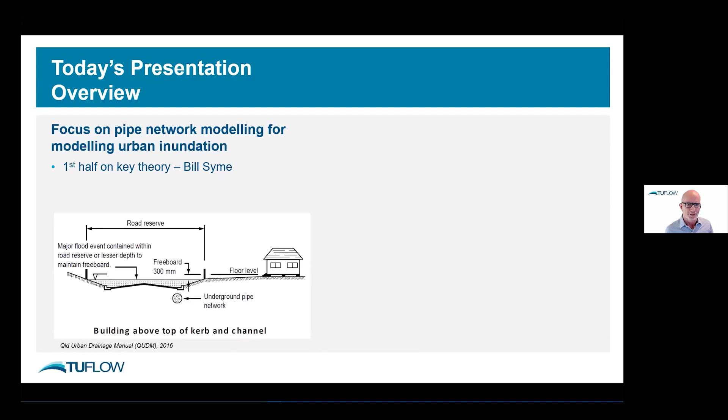The first half, I'm going to dive into a bit of theory on some more probably challenging or interesting aspects of pipe network modeling in this space. And Chris is going to take over around halfway to look at practical and quality control aspects, particularly when you get into very large networks where you really got to be on top of your data, etc., which is hard to do when you've got a lot of data.

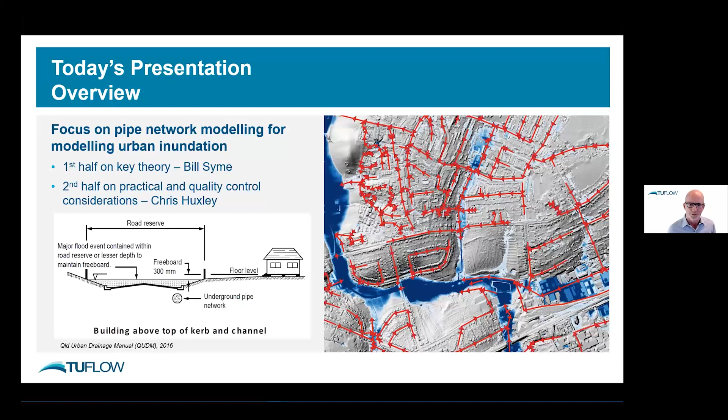So let's dive into the theory. Today what I'm going to cover briefly is the different pipe flow regimes, just to get our minds thinking about what sort of flow you can have in pipes. A large part of my presentation will focus around energy losses, particularly in manholes, because that's probably the hardest thing hydraulically to deal with, which I'll explain. And then I'll briefly run through some of the other aspects you come across in this type of modeling, such as overland flow capture, surcharging, blockages, and operational structures.

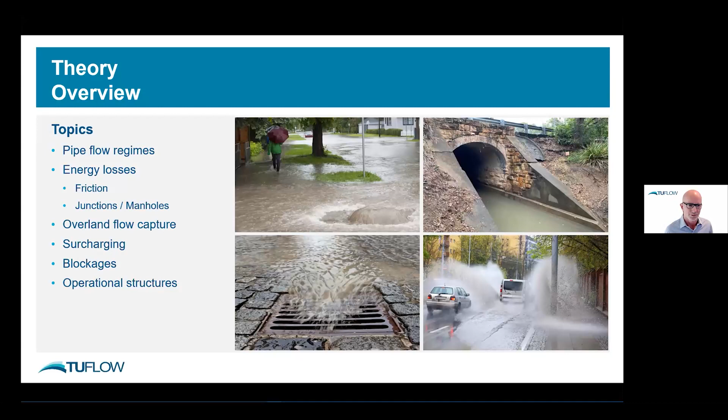A bit of terminology. Most of you will be familiar with this terminology, V for velocity. So I'll talk about the inflow or inlet pipe velocity.

So this is the velocity of the water flowing into a manhole, and velocity out, VO. Hydraulic grade line is commonly used, and the way to interpret the hydraulic grade line is effectively the water level. But when your pipe is flowing full, you have to imagine it as the water level if you stuck a vertical tube into the top of the pipe. It's not the total energy, which is water level plus V squared on 2G.

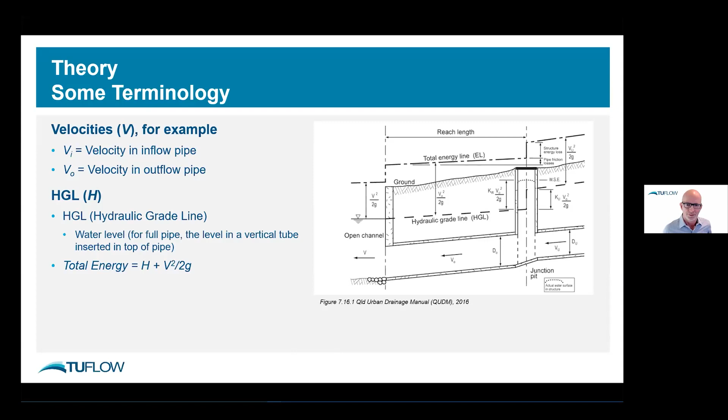Something we'll talk about quite a lot is the energy loss coefficient, which in this presentation I've used K, but other symbols like C are used. What we're talking about there is the loss of kinetic energy, which you'd know as V squared on 2G, the difference between your water level and the amount of energy the water has to keep moving itself downstream.

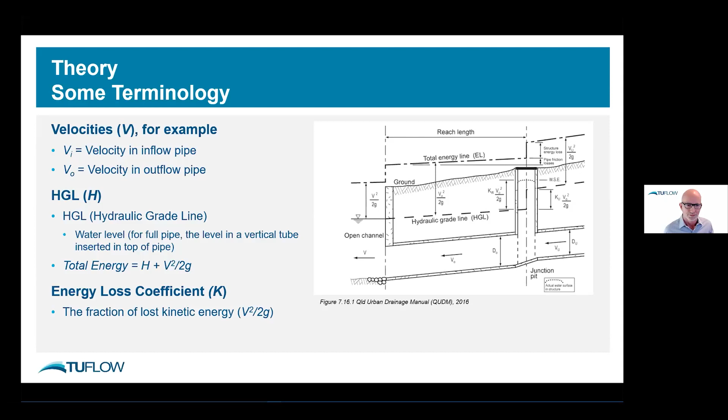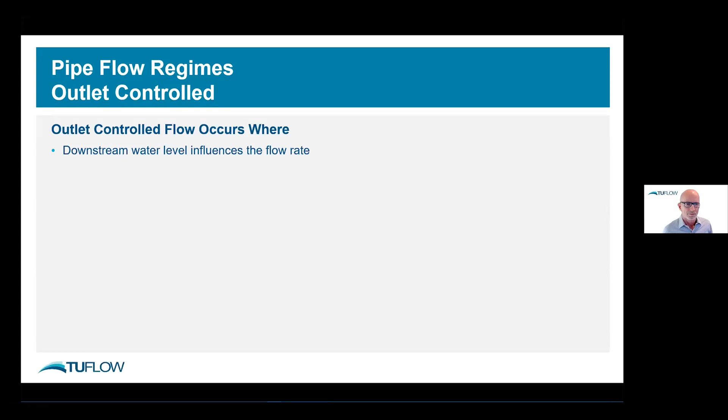Some pipe flow regimes - this is really about whether your pipe is outlet controlled or inlet controlled. It has a big bearing on how you establish the flow and the energy losses around your pipe network. Outlet control occurs where you effectively have a tail, a submerged outlet. By and large, it nearly always - what is key is that the flow is subcritical, and some people use the term pressurized. The water level could be below here, but importantly it mustn't go below the critical depth or around that point. So that's outlet control mode in terms of those two outlet scenarios.

In those cases, both inlet and outlet energy losses of that pipe will be important, as well as friction losses along the pipe. There is one other mode, and that is when you have free outflow. In this case, the flow is subcritical approaching the outlet, and the water transitions through critical depth. So that will also be outlet control, because the control is at this point here where it goes through critical flow. What's important to note here is the exit loss you'd be familiar with doesn't really apply in this case - it's just the inlet loss and, of course, friction.

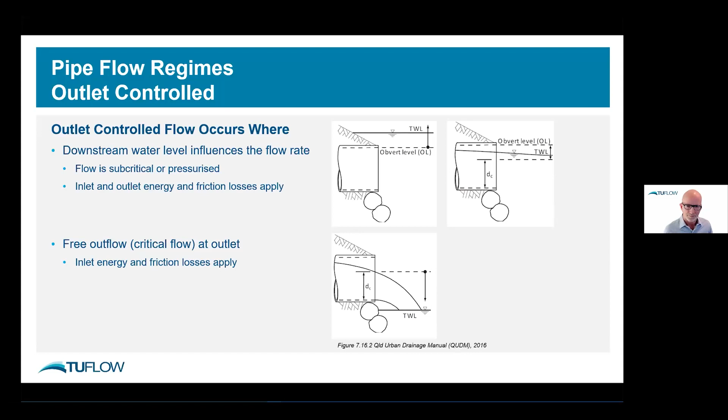Inlet control flow occurs where basically you might have supercritical flow, or the pipe is sufficiently steep to generate supercritical flow, and so would transition through the critical flow point. Also, sometimes when you have orifice flow that's not drowned out, the orifice flow forces critical flow regime inside the entrance, and that would also be an inlet control regime.

What's important to note in this space is that the downstream conditions have no effect on the flow rate, and entrance and exit energy losses aren't used in the computations.

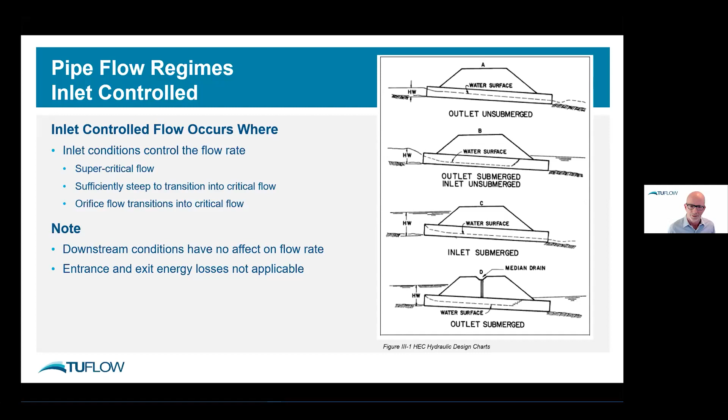So just touch briefly on the one that you would all love and know, Manning's equation. Basically it's the loss of energy due to friction - the change in energy or change in water level is a function of the friction slope times the length of the pipe.

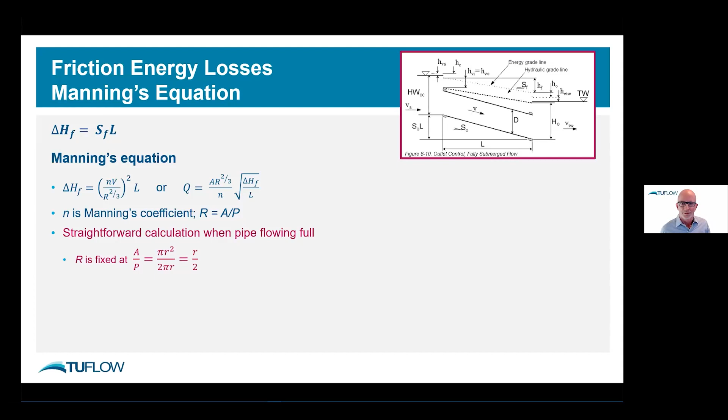This is the Manning's equation rearranged in different formats here. I won't really go into details, but what's important to note when you're in pipe world is when the pipe's flowing full, it's actually a really standard, straightforward calculation, because the hydraulic radius reduces to the radius of the pipe on 2. So it's very, very straightforward - there's no sort of complications with determining the friction contribution to losses, and you can see that in that diagram there. When everything's flowing full, you just have the friction loss plus any entrance exit losses. The more challenging one is when the pipe is partially full.

That's an open channel flow problem. It's not straightforward because you can't simply solve it - everything is dependent on either side, and you have to revert to some sort of open channel solution, which becomes a bit complicated if your pipe element is quite long, because your velocity down the pipe will change as your water level is slowly rising inside the pipe. In this case, the water level is slowly dropping because you've got a free outflow.

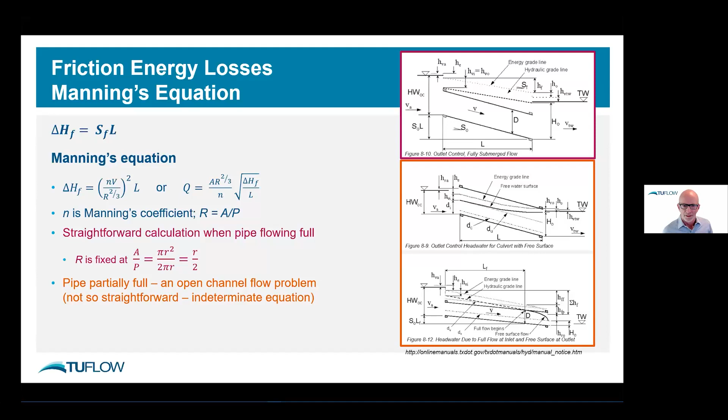So it's not a straightforward calculation. In terms of Manning's n values, as you would all know, there's plenty of guidance in the literature. Pipes will vary, and really all I want to say is if you're using Manning's n values outside industry guidelines and something is wrong, you have to have a very good justification to do that. And if you're calibrating a model, always stay within the guidelines and look elsewhere for why you might have a poor calibration.

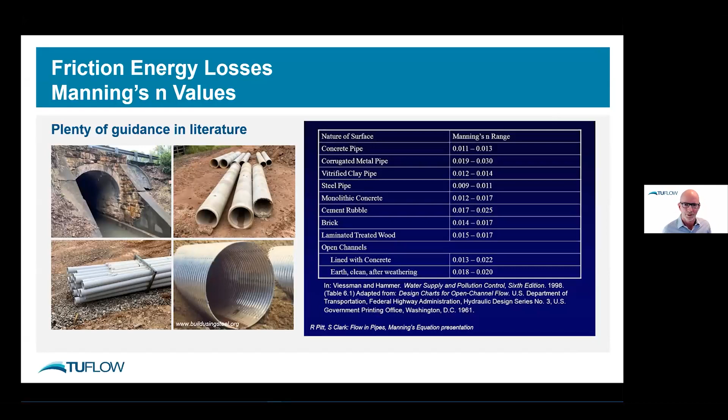So what I really want to focus on is the kinetic energy losses associated with manholes, and a simpler version would be a junction where there's no manhole. Bends and obstructions sort of fall in the same category, but what I'll focus on is manholes.

Besides the Manning's equation, this is the other equation that we all as modelers should really have in our heads when we're looking at our results. You don't have to worry about the full-blown shallow water equations in a way, you really just have to look at where your model is losing energy. It can lose energy in two ways: friction, which I just explained before, but when your water is being forced to change direction, you have a kinetic energy loss, and this is always a fraction of the velocity squared over 2g, and we use k to describe that fraction.

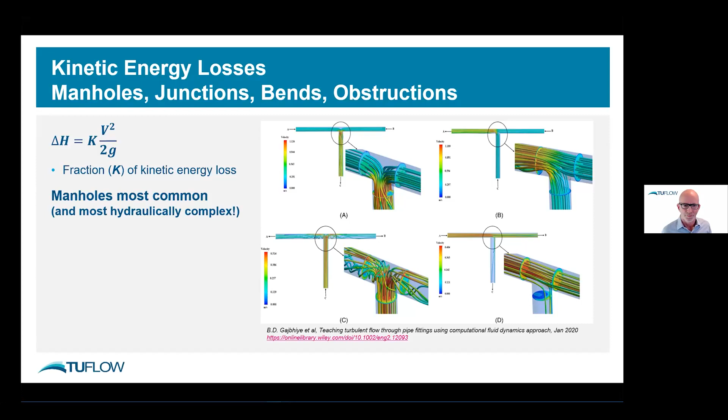So the most common element in your pipe network model that loses energy in this manner is your manholes, but it's also the most hydraulically complex, as I'll explain.

But first, we have to think about why we have manholes. From a modeling point of view, it would be much easier if we didn't have manholes, our life would be a lot easier. But they are needed, and needed for very practical reasons, such as during construction or if you need to maintain the pipe network. They're often used to accommodate a transition if you're going from a small pipe to a large pipe, where you've got a pipe coming in the side. And they're often the point at which you receive water from above-ground inlets. So they're very important in pipe network modeling, but they're really challenging to model.

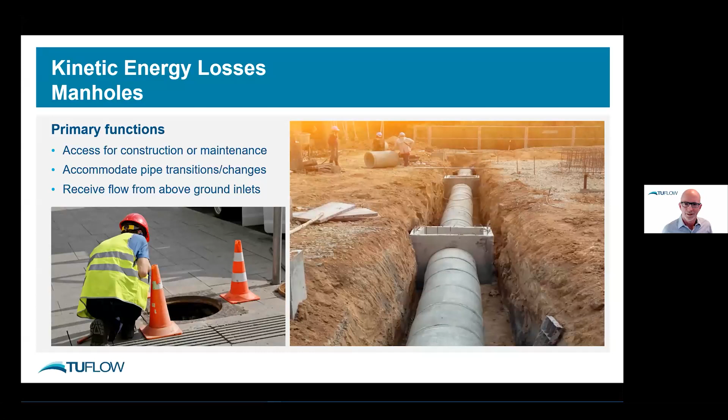So let's just look at what is going on inside a manhole. It's all about the kinetic energy losses around and through the manhole. So here we have a circular manhole, incoming pipe, outgoing pipe, some streamlines - the water will come out, it will expand, and it's that expansion of water out through here that is where you get your energy losses.

What water hates - water is very happy to contract, but it really hates slowing down. The way you have to think about it, an analogy is it's quite easy for us to jump out of something and speed up, but it's pretty brutal if we come to a grinding halt. Same with water. As water slows down, it's pushing against the water in front, so it has to dissipate energy as part of that process. It's when the water slows down or is forced to change direction that you lose that energy, and that's what it's all about.

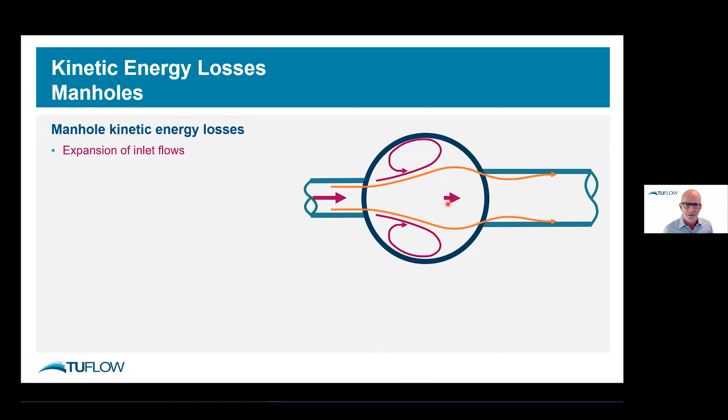So obviously here, the water's coming into the manhole, it's going to expand, you're going to have circulations generated, and energy will be lost. The other side of the coin is when the water recontracts back into the outlet pipe, you'll form a constriction here, which we call the vena contracta, and you'll have a high velocity there. Then that water has to re-expand downstream of that vena contracta, and that will involve more energy losses.

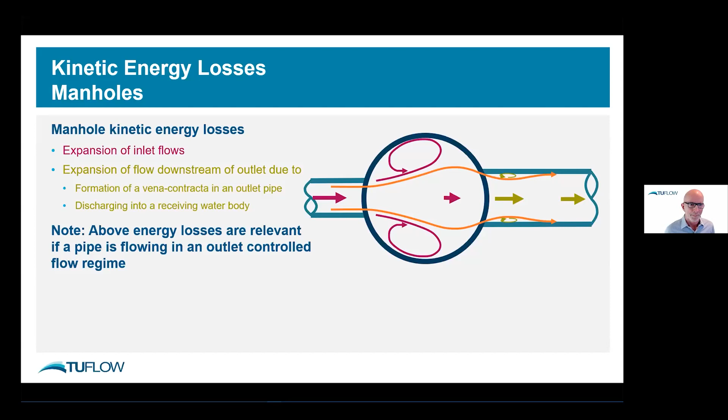So the other thing to quickly note is these energy losses are really only occurring, or are important in our modeling, when the pipe is in outlet controlled flow regime.

Let's look at other types of energy losses that can occur in a manhole. If there's a change in horizontal alignment, so if you have a pipe coming in at a different angle to your outlet pipe, the water has been pushed across to the side here. It's been forced to do something much more nasty than if it was in a straight line, and you'll get greater energy loss due to the more intense turbulence around there. So a change in horizontal alignment of your pipes, or if you have two pipes coming in together, will certainly create additional kinetic energy losses.

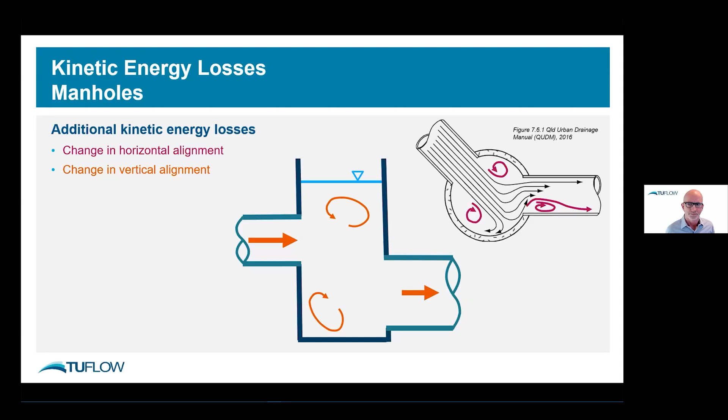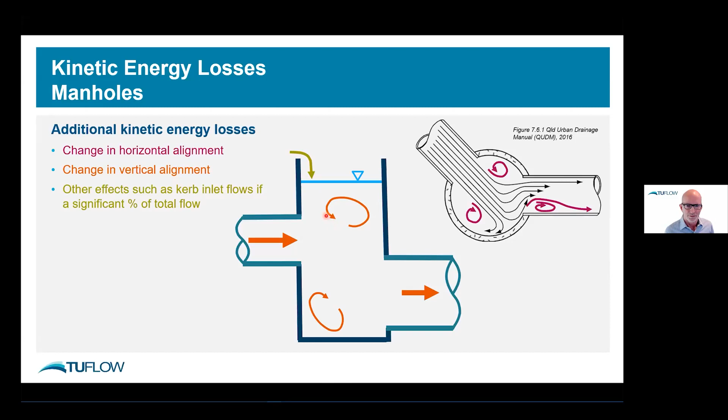Also changing vertical alignment. Here we have a pipe coming in, dropping down and then going out. That will also create additional turbulence than what you would get if that pipe was in line with the outlet pipe. And you can have other effects. For example, if there's a large amount of water coming in, either from kerb inlets or some other way, that can obviously affect the amount of turbulence you are getting inside your chamber.

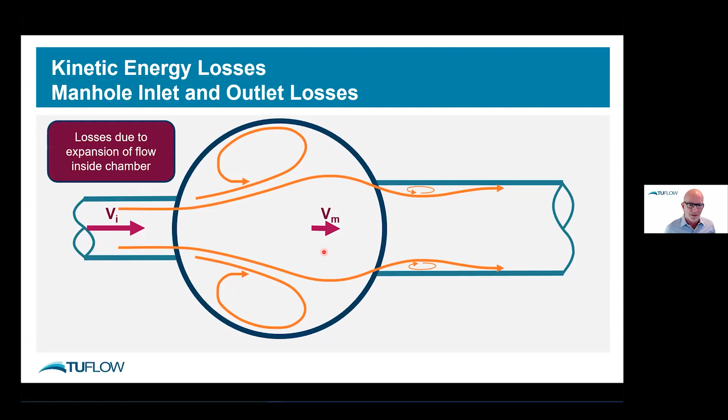Okay, let's do a bit of theory. Just as a reminder, this is our manhole. Flow's coming in, circulating, it's expanding, and so we're going to have losses due to expansion of that flow. So the inlet velocity will be quite a bit higher than the velocity in the manhole, and obviously the manhole is just highly turbulent.

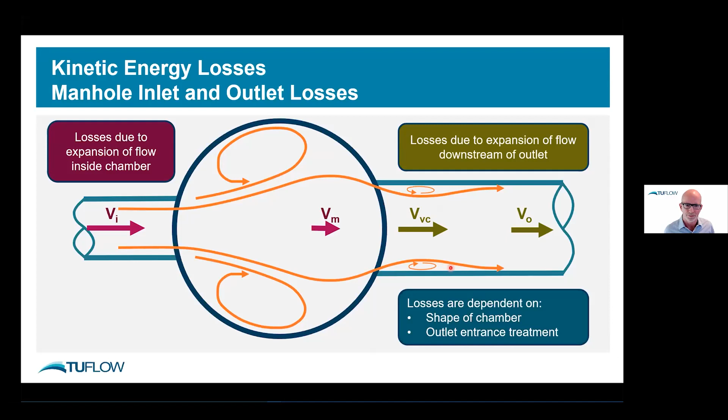But at some point it reaches a minimum velocity, then it recontracts. This is your velocity in the vena contracta, which would be the highest velocity. It'll re-expand, and then you get more losses in this space here as that water re-expands. These losses are very much dependent on the shape of the chamber and the outlet entrance treatment. So the outlet entrance treatment is what you do around this point here, because if that's nice and smoother, you will create a smaller velocity in the vena contracta, because the vena contracta will be larger. This little eddy here will be much smaller, and separation will be less.

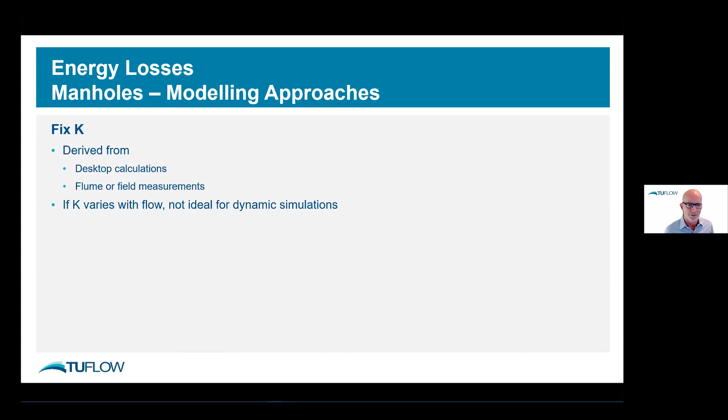So there are a couple of ways we can go about modeling these. The two most common ways: one is to just provide an energy loss coefficient, K, fixed for the whole simulation, or if you're doing a steady state type analysis, that's fine, it's just one K value. These K values for manhole configuration are derived from either desktop calculations or actually from measurements in a flume or possibly the field. And if K varies with flow, in other words if the energy loss changes from low flow to high flow, then it's not really ideal to use this approach, but it may be the approach that's preferred. But if K stays fairly constant throughout the course of the event you're modeling, then it's fine.

There's plenty of values in the literature for different manhole configurations. The only thing to be wary of is when you see a K value quoted, be aware of what velocity it applies to. By and large, a K value, the total K for a manhole, will be based on and adjusted to meet the outlet velocity Vo.

The other approach is to vary your K according to the flow conditions. That approach uses equations for the different loss components, and your model is actually recalculating those components every time step to adjust the K according to the flow conditions. That's quite a nice approach, particularly for dynamic models, which are modeling quite a large range of flows.

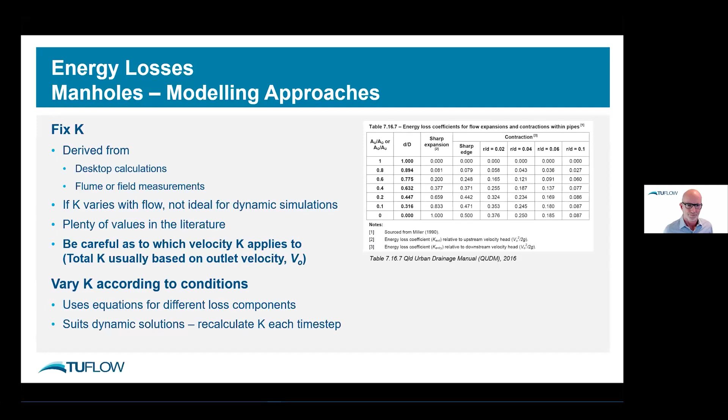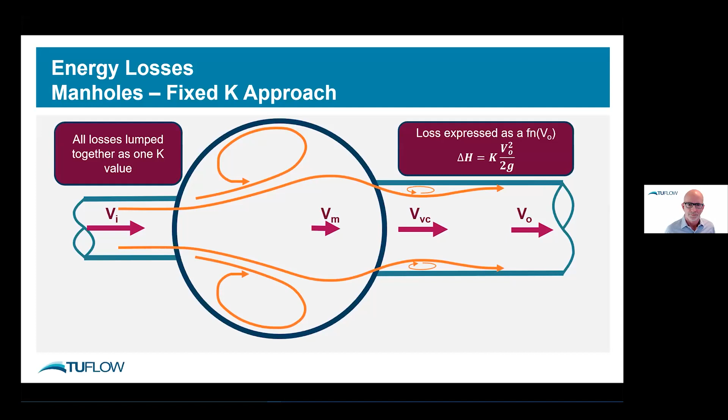Okay, so let's look at the fixed K approach. The objective here is that we come up with one K for this whole manhole. So essentially we're lumping all these losses we've been talking about as one K value, and the loss will be expressed typically as a function of the outlet velocity, that's the velocity down here. Let's assume that we only have inlet and outlet losses in this case. We don't have any sort of alignment issues. This pipe here is pretty well nicely aligned with this pipe here.

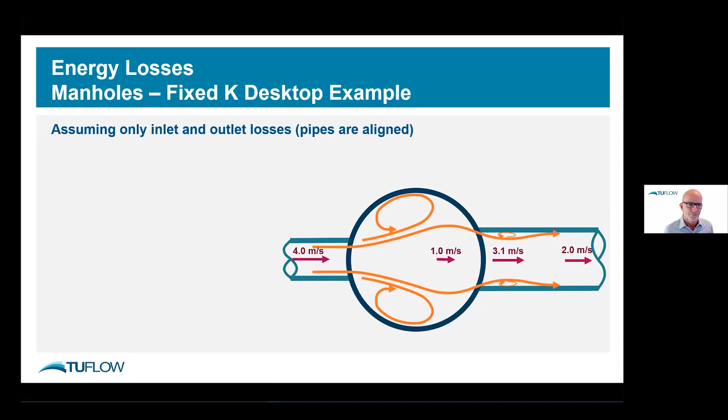I won't dive into these equations too much, but basically you can derive this equation here, which is the energy loss due to expansion of water. The way to think about it is, if your velocity downstream is zero, such as if the water is discharging into the ocean or a lake, you'll lose your complete kinetic energy because the water is going from, say, 4 meters per second to zero. So you will actually lose that complete V squared on 2G. But as in these situations here, the water doesn't lose all its force, and so the energy loss is going to be a fraction of that V squared on 2G of the upstream one. That equation can be derived from first principles, and it's commonly used in modeling.

So let's do a few calcs. We have here the inlet loss based on the velocity here and the velocity here. If you plug that into the equation, you end up with a K value of 0.56 on Vi squared on 2G. So 0.56 times 16 on 2G.

In terms of the outlet loss, it's a similar sort of exercise, but we're going from the vena contracta to here. If we assume there's about a 20% contraction here, that will give a velocity of around 3.1, because it's related to the area. So we're going from 3.1 squared to 2 squared.

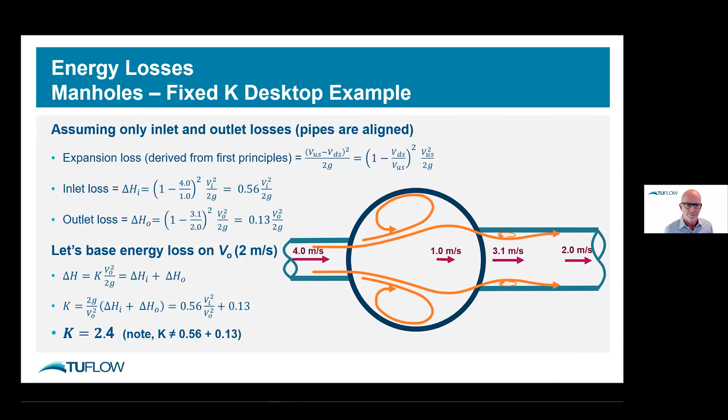In terms of the variable energy loss approach, we effectively take the individual losses at all the various locations, the expansion here, the expansion here, and add them together. These are the equations we use. For the inflow loss to the manhole, it's using the equation we just talked about. The tricky thing is what velocity in the manhole you should use.

There is a fair bit of uncertainty around that. The conservative approach will be to use a velocity based on the full width of the manhole, but sometimes it may be very justified to use a smaller width, which would give a larger velocity and less losses.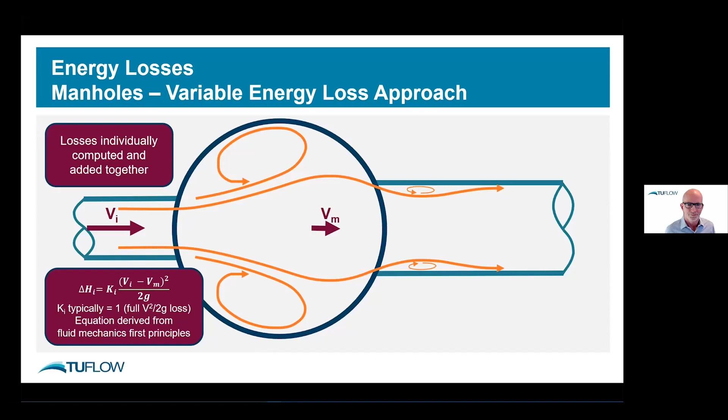On the exit, it gets a bit more challenging because we really want to know the loss from here to here, but we don't really know the contraction, and it doesn't give us a nice exact solution. So what models tend to do is use experimental data, with equations based on the manhole upstream velocity and the downstream velocity. The contracted velocity doesn't come into the equation. That's typically what's done for your inflow and outflow losses.

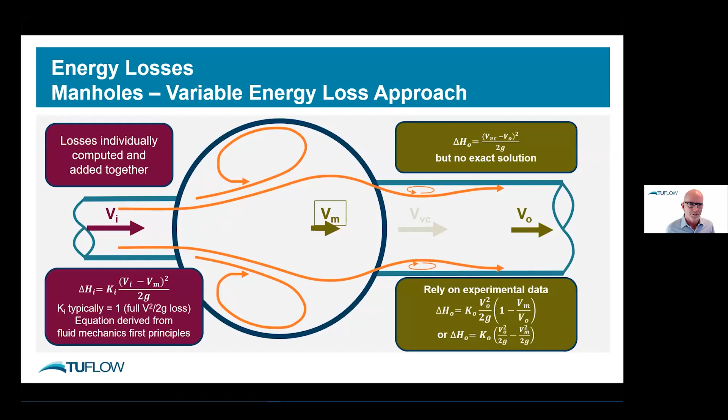This approach also has an allowance for unaligned pipes, where pipes come in at different angles. That's obviously going to create greater energy losses, and there's an equation here based on the Engelund method which accounts for that. It might also account for a change in pipe elevation.

So this variable energy loss approach uses various loss components, adding them together to give a total K value, but recomputing those every time step to give you changing conditions.

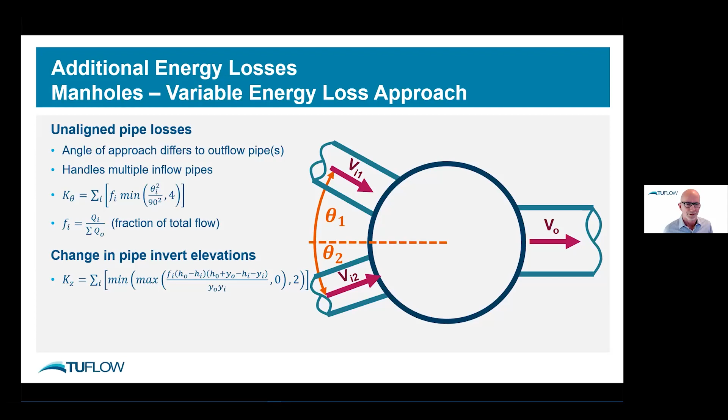Just a few things on minimizing energy losses in manholes. The objective to minimize your energy losses is to maintain your velocity through the manhole. So keeping the chamber size to a minimum is a good idea, and the other thing you can do is minimize turbulence and eddies.

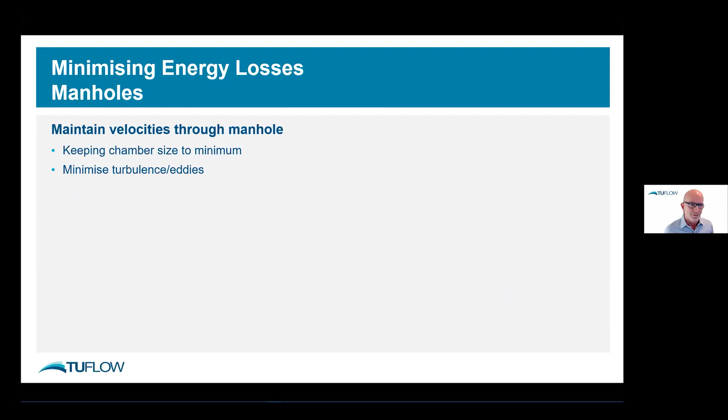One thing you can do is direct these pipes so that the flow targets the outlet point. That could give a more efficient result, maintaining the velocity or inertia of the water through the system, which gives you less losses. Benching is also used, particularly at lower flows, where you bury the pipe into the bed of the manhole.

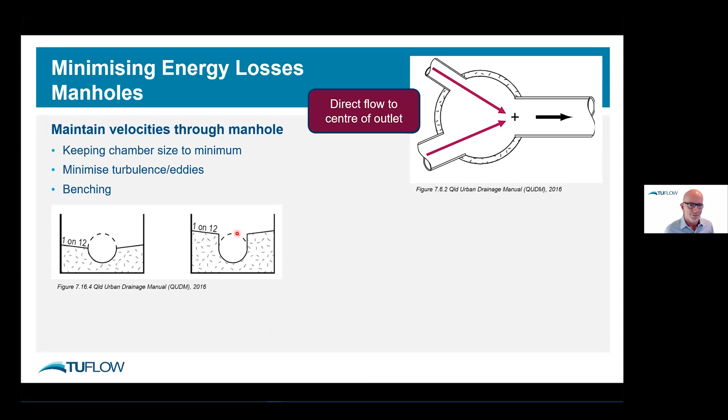So basically for flows that predominantly stay in this level of space, that will maintain a velocity through the system as well. You can also minimize the vena contracta, the contraction of the water at the outlet, and the losses associated with that. One example is using something like a curved entrance, a bell mouth outlet pipe entrance.

What that does, of course, is minimize the amount of contraction. Keep this as big as you can and minimize the size of the eddies and the separation. That will reduce your vena contracta velocity, and therefore produce less losses. So there's a range of things you can do to make these manholes more efficient.

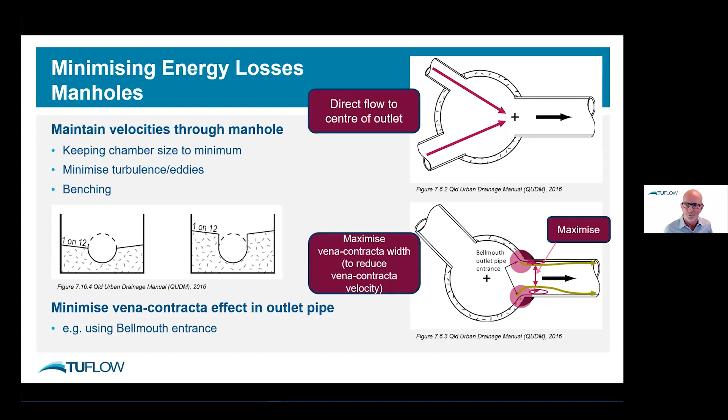I'll just go through a few other things fairly quickly. They're not so challenging theoretically, but they are aspects of pipe network modeling we need to consider. So, above ground flow capture—that's your inlets, pit drains, gully traps.

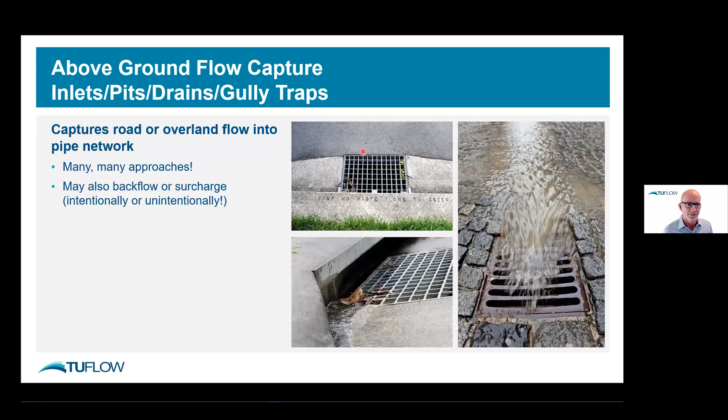There's quite a lot of approaches to how we deal with these, and they may also backflow or surcharge. So you get lots of weird and wonderful designs in terms of how to capture water from above ground. We also call these things lots of different terminologies, so we have lots of names for them, which makes it a bit confusing at times.

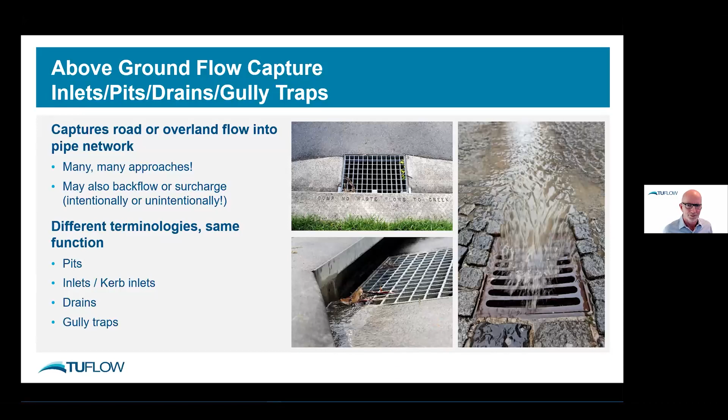The key thing is that basically there's two types of inlet, or in the industry—certainly here in Australia—two approaches. There's the on-grade inlets, and these are situations where you get a reasonable amount of bypass flow. The water comes down the gutter and bypasses, so the inlet, the pit, doesn't capture all the flow. There are often approach flow versus capture flow curves for these types of pits.

And they can also be converted to a depth versus flow curve as well. Often the relationship, these curves, are derived based on flume tests and measurements. These are out of the University of South Australia.

But what's also really important—and we're not going to go into this in detail today—is that the above ground depths or approach flow is well represented, because particularly most of these models these days are linking to a 2D domain above ground. So it's really, really important that the depth feeding into these pits, into these inlets, is accurate.

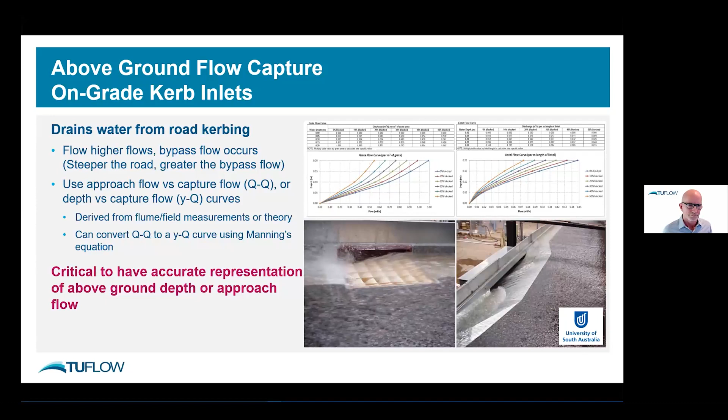Sag inlets are the other type of inlet, and these tend to be where you have water ponding at the end of the drain, maybe, or something like that. Water is basically being captured, and this tends to involve very low velocities around these, so it's quite a different loss mechanism.

There's no bypassing assumed in the curves. The other thing to be considerate of is that these are very good at collecting debris. I'll mention blockages in a second.

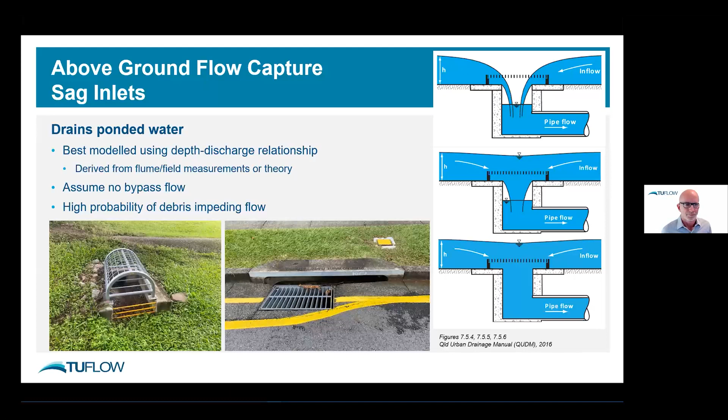These pits or inlets can also backflow, they can surcharge. So your modeling has to be able to handle that, and there's different ways of doing that. It's very important that when your pipe capacity gets exceeded, the water can reverse, if you like, back up and out through the system.

The reason that might happen, of course, is you could have blockages in the pipe network. You might have a river in flood, which is not allowing the pipe network to discharge. There's lots of reasons why this happens, so it can be quite important to be able to model this effect.

You may even need a different depth discharge curve to do that. And just be conscious that sometimes the actual water level on the ground will control—it's basically downstream controlled in terms of the amount of water that comes out through the surcharging.

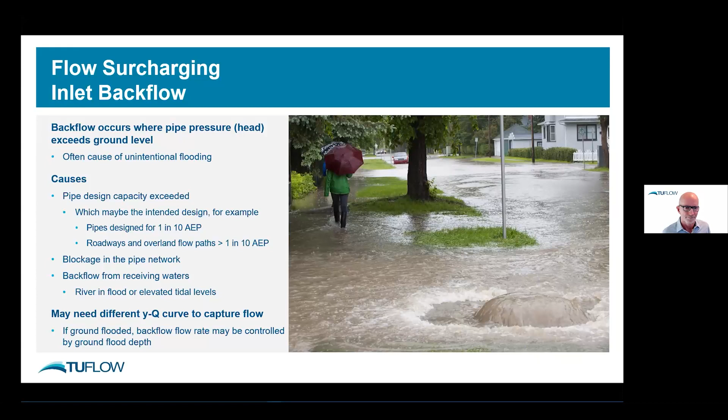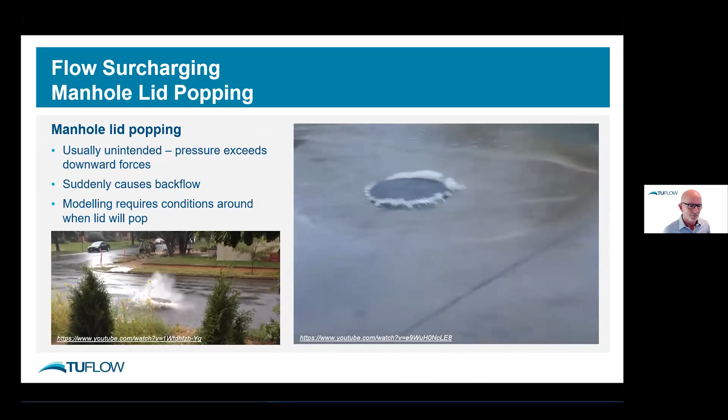The other thing that can happen, of course, is your manhole lid can pop, and that can cause a lot of sudden backflow and all sorts of problems. Probably what I wouldn't recommend is doing what this guy's about to do—he's quite brave and stood on that—but good thing, because I wouldn't recommend that when you see what can happen in something like that.

Blockages are a huge issue, typically a really big issue. In Australia there are lots of strong guidelines around that, and no doubt in other jurisdictions there are as well. Blockage can have a major impact on how your water gets into your pipe network system, and of course even internally inside the system.

This is one of my favorite photos. This bridge here, the rails on this bridge were specified because they're not prone to collecting debris. Anyway, so it can happen.

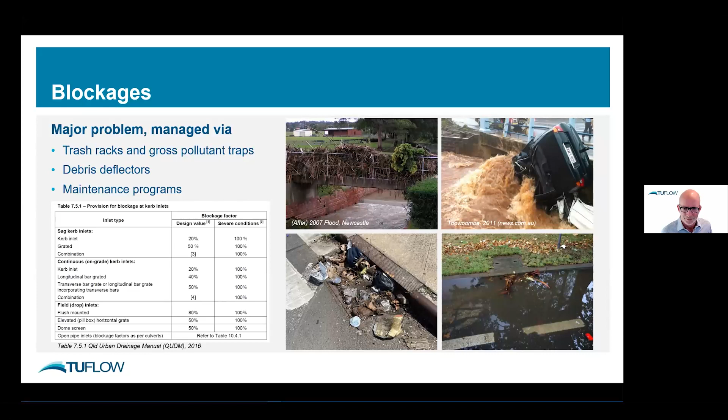Just to finish up for my side of things, operational structures - I'm not going to go into those, but they often occur in these pipe network modeling. So you may need to be able to model backflow devices, and they can have very specific energy losses associated with them, pumps and gates and other things like that. But we have a webinar coming up on April 13th where we will be diving much more deeply into operational structure modeling.

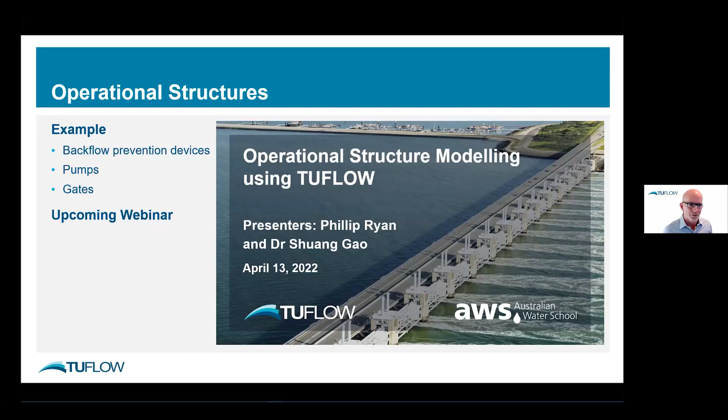So that's all I had to cover, and I'll now hand over to Chris.

Okay, thanks for that, Bill. That's all the theory. Based on the feedback we've received from previous webinars, there's a call for some more practical examples. So I thought rather than continuing on with the theory, I'd provide some demonstrations, basically how to quality check the data that goes into your models. This is particularly important with pipe network models because you're often dealing with very large data sets.

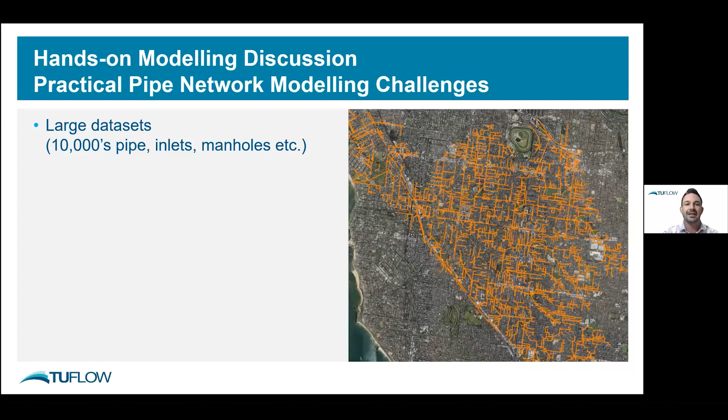This example here is a catchment down in Melbourne. This is actually what triggered the tool that I'll be presenting later on. It included over 10,000 pipes, inlets, manholes - a very, very big data set. And it was of varying quality. There were lots of issues with the data.

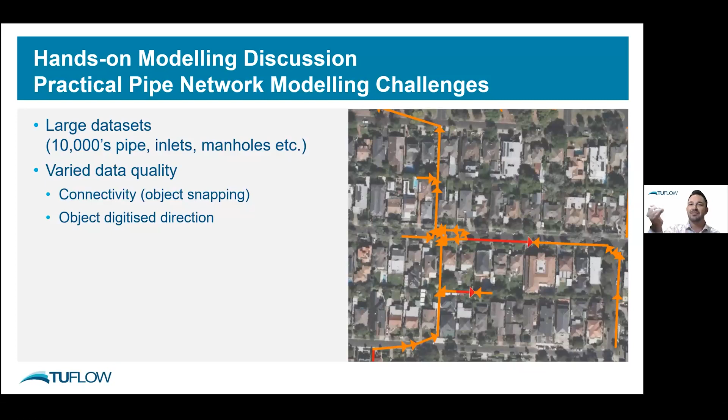There were connectivity issues - that's where, in reality, the pipe network is all connected, but in the digital data set it's not. Alternatively, there were also object direction issues where the inverts of the pipe suggest it should be flowing one way, but it was digitized the other way, which would have actually caused things to back up. And there were just errors in the data.

Here's a long section. You can see there's one pipe which is digitized in the wrong direction. There's another pipe that is quite possibly not real - that small one there. In some other locations, there were areas where the pipe inverts were listed as being well above the ground level, which doesn't reflect reality at all.

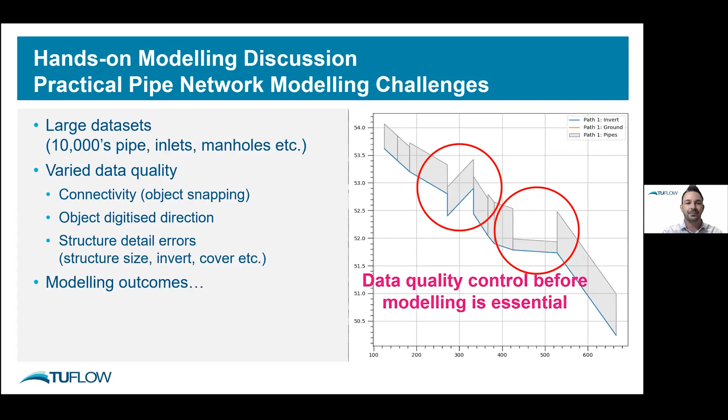With all modeling, when we're talking about modeling outcomes, the quality of the data that goes into your model has a direct impact on the quality of the results that you get out of it. So with that in mind, it's very important that you quality check your pipe network data before you even start your modeling.

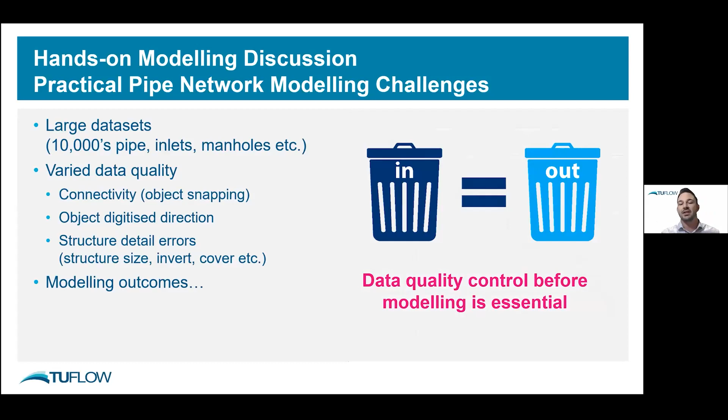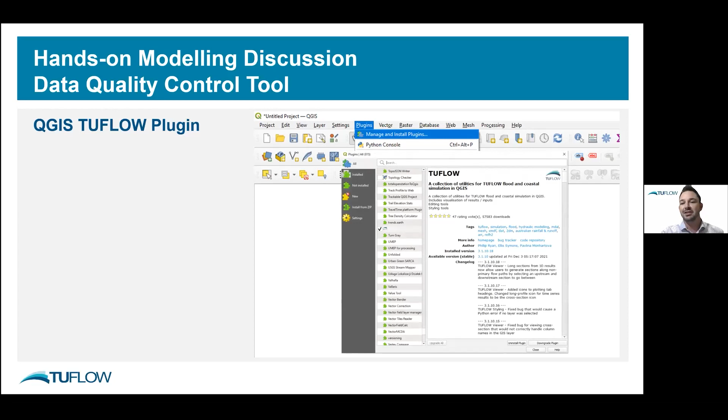I'll be doing that using QGIS, using the TUFLOW plugin. I assume that everyone is probably using QGIS, but with 1,000 registrations for this, even if 10% of you aren't, I'll go through the basics so you're at least familiar with it. To install a plugin, just click on the plugins tab and scroll down to manage and install plugins. If you're looking for the TUFLOW plugin, which I'll be using, search for it and click install. It's as simple as that.

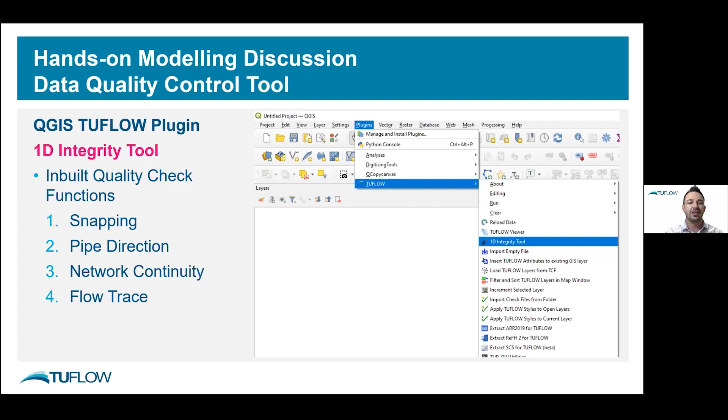After you install the plugin, you'll see there's a variety of different features included in the TUFLOW plugin, and one of them is the 1D integrity tool. That's what I'll be focusing on now, and there'll be 4 specific functions I'll provide a demonstration of: the snapping function, pipe direction check function, network continuity, and also flow trace.

The prior data set's probably a bit big for a demonstration, so I've pulled this down to a smaller model. This one here only has about 1,000 pipes. It uses a 2D cell resolution of 1 metre per cell, and we've used a direct rainfall inflow approach. That's where every single 2D cell gets wet and then the water flows over, and where you've got inlets, it goes into the pipe network.

Let's start by looking at the snapping tool. First of all, I'll just open up the 1D integrity tool and load in the input data sets. When you load the integrity tool, you'll see there are 2 different blocks to the interface - an input layers block and also the functions block. In the input layers section, you can actually load in multiple different data sets. If your pipe network data is made up collectively of, say, 10 different data sets, you can load them all in at once and it'll assume they're all together for subsequent analysis. So we'd load those files in.

Once they're loaded, it's just simply a matter of going down to the function that you want to use and clicking run. Here I'll start with using the snapping tool. It's essentially looking for any locations in this pipe network where the features are not snapped together within a defined exclusion radius - within 10 map units in this instance. It's identified around a dozen locations where it thinks there might well be pipes that should be connected that aren't. If we zoom in on one of these locations and just look at the input data set, things look like they line up, but zooming right in, they're not.

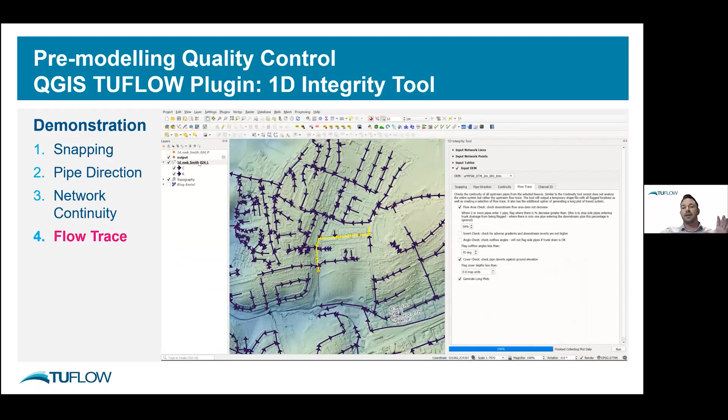The other useful feature of the flow trace is literally just checking that the full pipe network is connected as you'd expect. What you do here is click on the most downstream pipe, turn off the long section plot, and just click run, and it'll show highlighted the whole connected pipe network to that particular element. What this is doing is basically giving you a way to confirm that everything is snapped together.

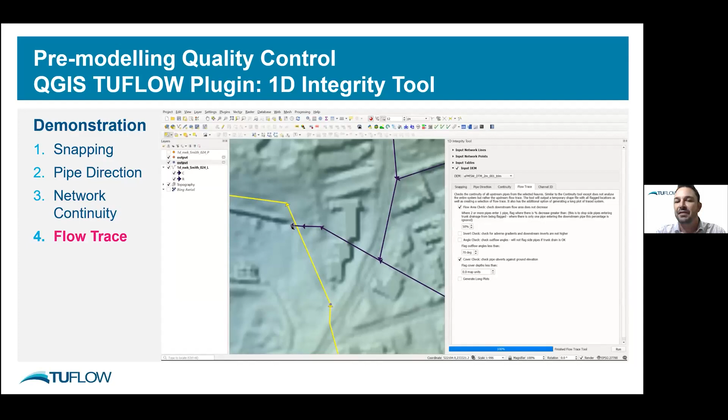It could be that the snapping radius used in the initial step was too small to pick up a disconnection in the pipe network. If that's the case, doing this for each outlet to your pipe network will confirm that things are all connected as they should be.

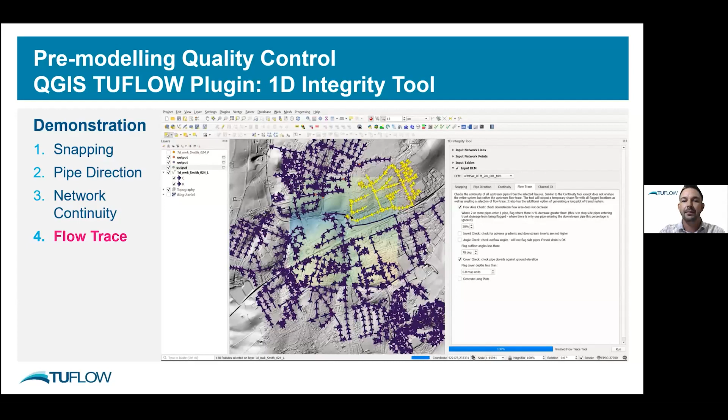In this instance here, both of those sections of the pipe network are meant to be separated. They're not meant to be connected.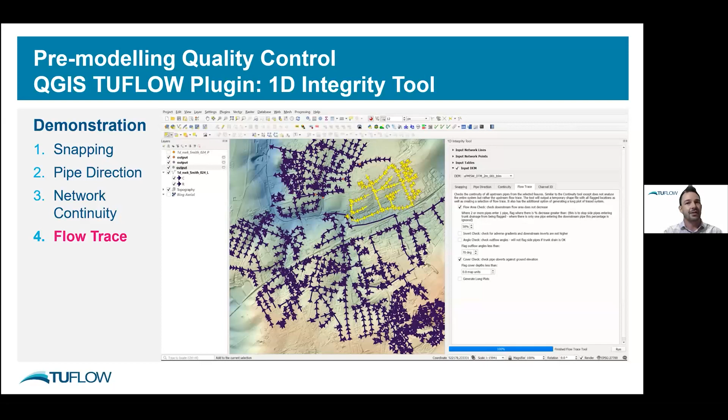All right, so you've now gone through and you trust the data that's going into your model. The next step would be to enter that data in the model, run the simulation, and look at some results. I like to focus on a few different summary results to help guide where I need to interrogate my 1D and 2D results more closely to confirm whether the results are correct or not.

For this, I'll be looking at 2 different event result data sets. One will be for a small event that roughly matches the expected capacity of the pipe network. Another is for a much larger event, which is orders of magnitude bigger than the expected capacity.

So there I've loaded in the pipe capacity summary file, max min flow summary file, and now I'm loading in the dynamic 1D, 2D results. So once again, you'll see I'll open up 2 different result data sets here, one for the small event and one for a large event.

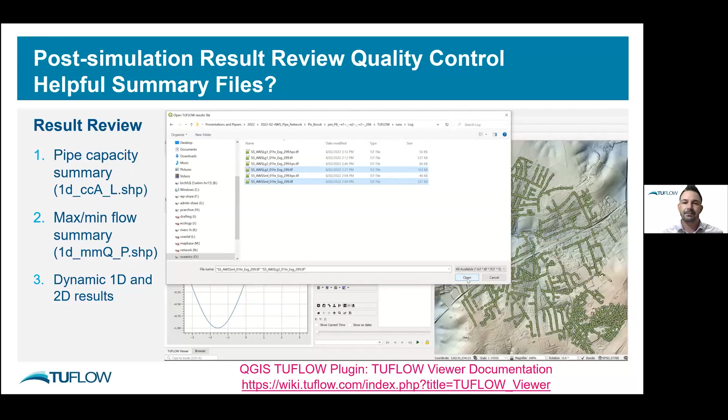Okay, those results are loaded. Let's now first focus on the pipe capacity summary result, and I'll be using the event which matches the capacity of the pipe network.

First of all, let's just look at what attributes are included in this file. You'll see there's some flow summary results, so percent full max, percent time when it was full. There's some area summaries, and then there's also some surcharge summaries.

For this demonstration, I'll be focusing on a review of the percent full max, but it might also be useful when you're doing these reviews to do a similar analysis for all of the elements where surcharge is being experienced. I won't go into demonstrate that though - you can basically mirror what I'm doing with P max for surcharging. In the interest of time, there's no need.

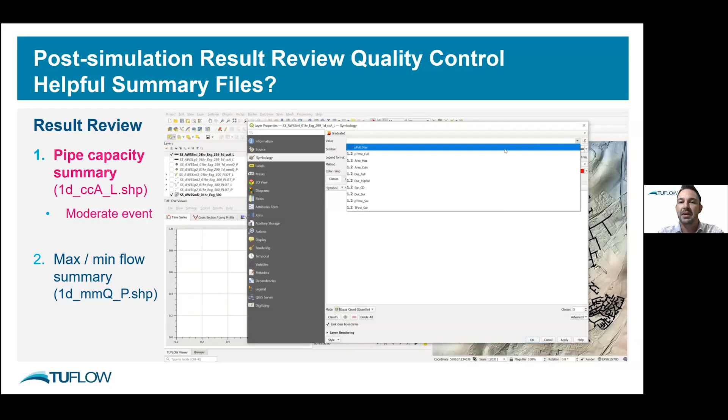All right, when I'm looking at that data set, what I like to do is just basically change the symbology of the file to enable me to differentiate between the locations of the model where I've got a high percentage full versus a low percentage. Here, 100 is set to a value of red, transitioning down to a value of 0, which will be blue.

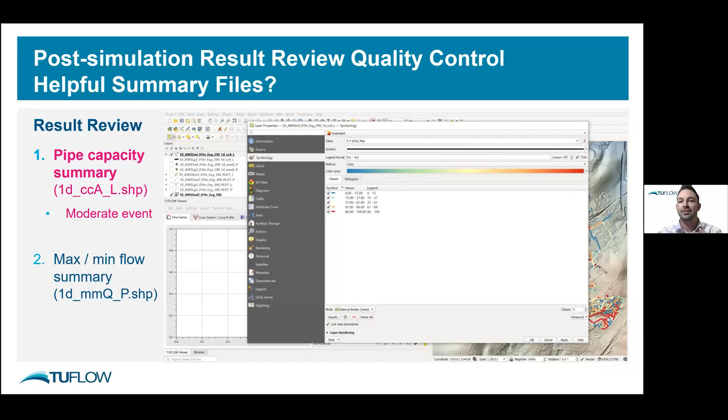Once I've made that change in symbology, I'm basically looking for areas that are an unexpected result. I'll zoom in on this particular location, where I can see the pipe network. Let me turn on my pointer.

Here we can see the pipe network is red, so it's at full capacity. It drops away before coming back to full capacity again here. So I'll review the results in both of these locations to see if there's something unexpected.

I'll use TUFLOW Viewer for this. To start with, we'll look at the time series results. Switch off the summary file, load in the actual 1D results, and I'll select flow as the result type.

Then I just need to select particular elements in the pipe network where I'd like to review the results. So I need to select that file first. There we go. You can see the flow through that element and the flow through the one downstream. They actually don't change all that much, which doesn't really correlate or compare well to the capacity map result.

That being the case, the cross-section long profile tool is quite useful. If I use it, I can select the same pipe elements and simply plot the culvert and pipes output type, and it will display the pipe network through that area. Here you can see that the pipe size has increased as you're moving downstream, so that explains why capacity has changed.

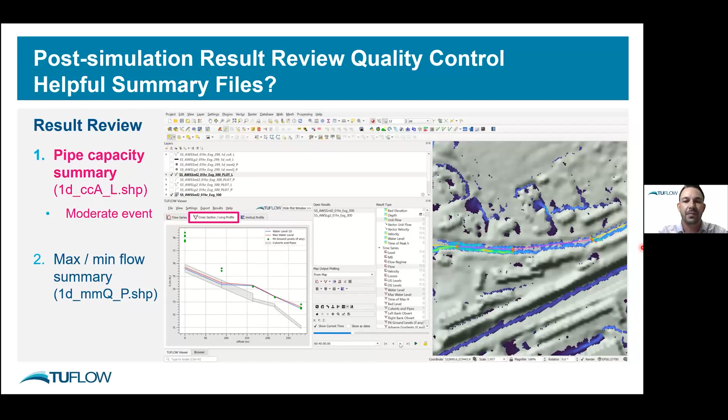All right, so imagine I've gone through the pipe network and done enough of a review for the moderately sized event. Now I usually switch over to looking at the same result file type for a large event, one which is much, much bigger than the capacity of the pipe network.

And here I like to just sort the data based on the P full max, percent full, or the maximum percent full for the whole simulation, and identify all of the objects which have a small number. These are pipes that are not flowing to capacity, and I'm just looking into each of those ones individually to assess whether that result is valid or not.

The other summary file I look at is the max min flow summary file, so the 1d_mmQ_P.shp file. I've already thematically mapped this one because I've shown you how to do that in the previous slides. Let's first of all look at what the table looks like.

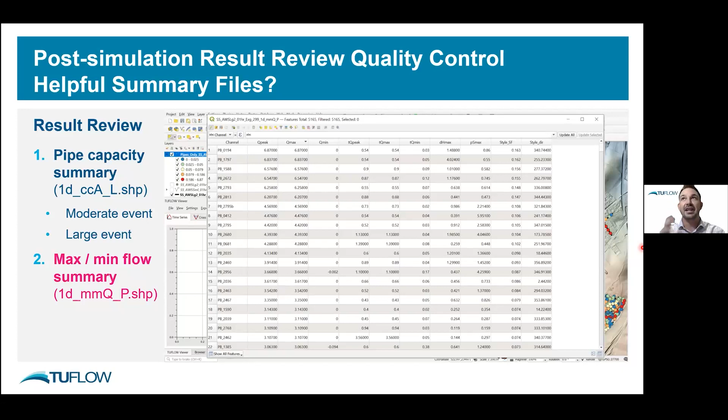If we look at this, you can see for every single pipe element, there is different flow statistics, or some statistics, flow summaries, different time summaries. So you can use this data in a variety of ways to identify those areas where the results aren't what you'd expect.

So if we look at this data, the areas that are red are high flow, transitioning down to blue, which are low flow.

And here's one location where things look a bit weird. We've got the flow transitioning from green up to yellow, orange to red, and then dropping away through here down to green and yellow before going back to red.

So once I've identified this as a potential area of issue, I go back to using the TUFLOW viewer and interrogating the 1D, 2D results again. It's exactly the same process. I would click on the result or the actual element of interest and plot up the flow results.

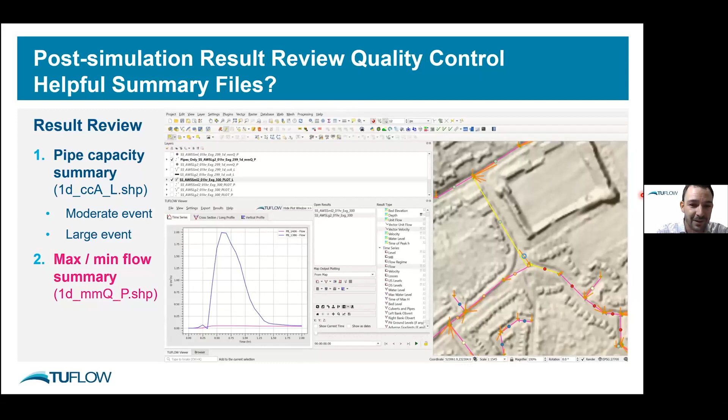So you can get a sense of what's happening here. That's the upstream pipe, there's the downstream pipe. It's going from 2 meters cubic per second down to almost zero. And if I click on the pit inlet, you can see that all the water is surcharging there because we've got that negative flow out of that pit. It's the green line in the graph.

Once again, we can look at the 2D results at the same time. I'll just skip straight to the peak here at 40 minutes. And there you can see that at the pit inlet, we're seeing quite a concentration of flow coming out in that location. So it's the source of quite a bit of the flooding above ground.

And yes, same as last time, we can also look at the long section. That can always also tell us some useful information. Here I'll click somewhere upstream, somewhere downstream, and I'll just plot the culvert just to see if there's any geometry issues. If there's not, then I'd look at other things such as the inverts on the pit versus the inverts on the pipe network itself.

In this instance, you can see that the pipe has gone from something that's around 1.2 meters down to 0.2 meters. So it'd be worth further investigation to see if that culvert that's at 0.2 meter diameter is real or not.

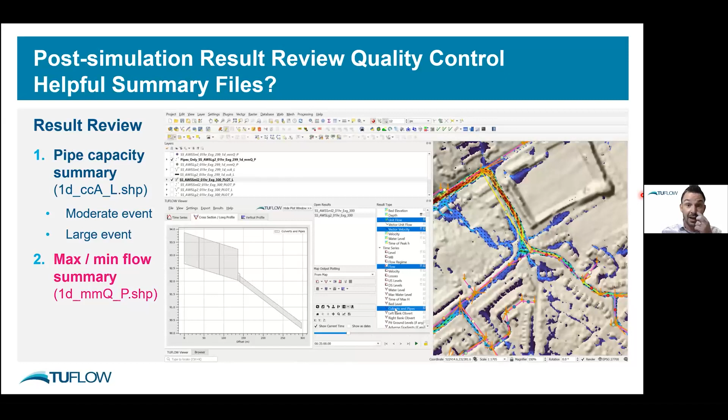Okay, when it comes to urban modelling, if you can calibrate, please do, because that will also identify areas where your model result isn't reflecting reality. That being said, it's actually quite rare to get calibration data for urban events or these urban stormwater events. That doesn't mean that you can't do comparisons against what's happening on the ground and what's happening in your model.

And I've often found that most councils, cities, would maintain a register of their stormwater problems, like a hotspot register. It's a very useful exercise to take that register and compare the hotspots in that to your model result. And if you're seeing that they don't correlate, then it's a matter of further investigation to work out why that's the case.

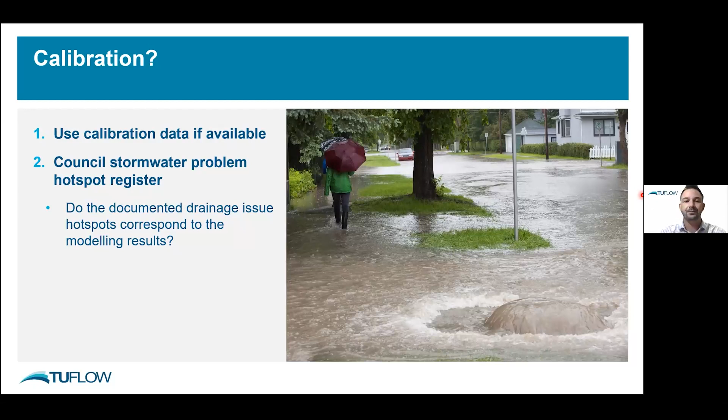So in summary, when it comes to pipe modelling quality control, for pipe network modelling, as with any modelling, the quality of your input data influences the quality of your outputs. So there's a lot of value in checking your data before your modelling, and also for your early simulations before you lock in a final model configuration.

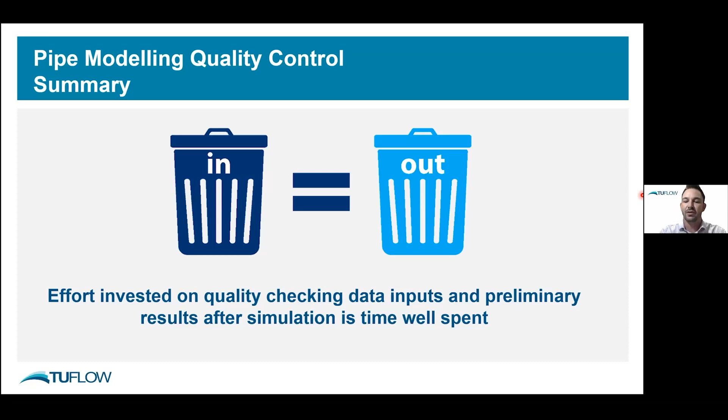Thanks, Chris, and Bill as well for those presentations. I'll run through some of the most upvoted. The first question that I'll go through to Bill is one that Bill has said he'd like to answer: Can you provide comment or guidance on modelling techniques to achieve the correct depth at the surface to ensure correct inlet capture with the pit rating curves versus depth? Can you comment on the role of unlimited inlet pits and cases where these are applicable? Often large-scale council-wide studies don't include all pit data like the small data, and the most upstream pits require a greater inlet to allow more flow in than the actual pit to represent the upstream network. Bill, that's one you flagged you'd like to answer, so that's straight over to you, mate.

Yeah, thanks, David. Great question or questions. These days, if you're using sub-grid sampling or the mesh refinement options such as Quadtree that we now have in TUFLOW, you'll get a much better representation of the depth at the entrance to these pits, so that is strongly recommended. If you're using an older version of TUFLOW, we don't have that feature. There is a road crossfall feature that people often turn on, and what that does is it just increases the depth at the pit using that crossfall slope, and that gives you improved capture. But certainly for new models, sub-grid sampling will, provided your DEM is sufficiently accurate, give you a much better representation of your depth at your inlets.